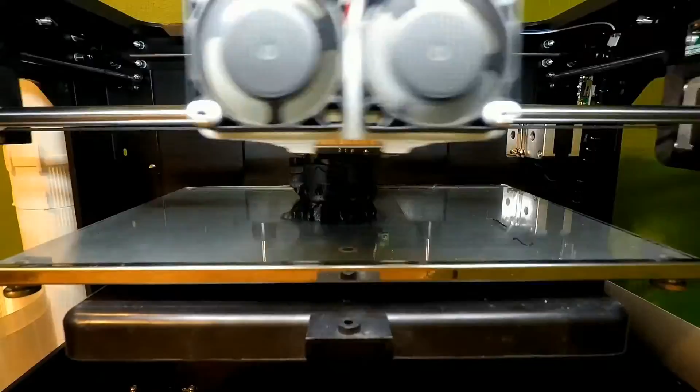All right, everybody, here's the tire. Let's go ahead and take it apart so we'll see what we have to make. We've got to make the actual tire itself, and then we also have to make the wheel hub with some clips put together. So we're going to go ahead and hit Fusion 360, model the tire up, and I'll also show you how to model the hub, print those out, and we'll install our new rim.

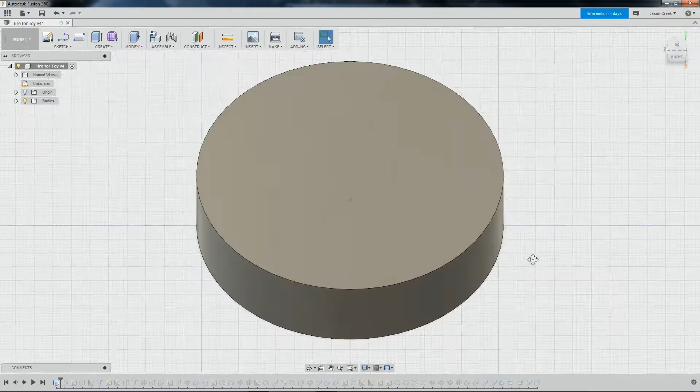All right, we're going to go ahead and make the tire. I've already done this, but I want to show you the steps I took to create it. First, you're going to need to make a cylinder the size of the tire itself. It's completely solid right now. Next, I did a fillet on the outside of the tire, as you see here.

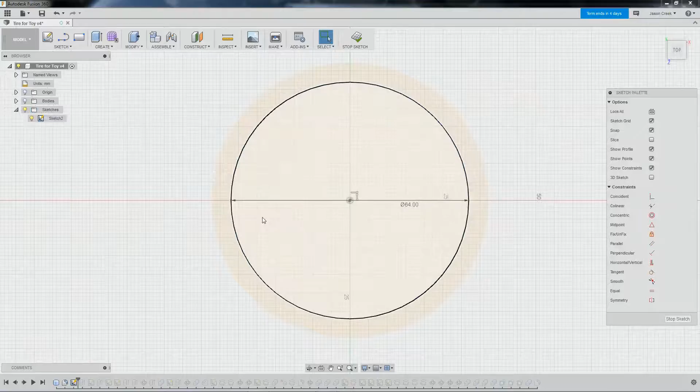We're going to do a sketch, and in this sketch, we've just created the inside of the tire. And we're going to extrude that new sketch to cut out the section for the hub. Another sketch is going to be created for the center, and that sketch is going to allow us to extrude the center section, which is actually going to fit onto the axle of the toy.

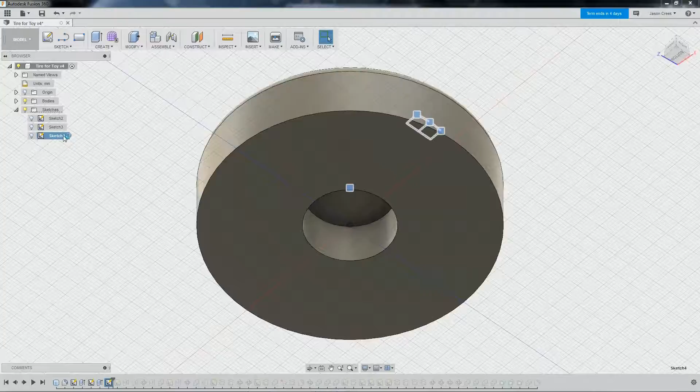Next, we're going to do another sketch, and this one, we're creating the holes that the hub will connect into. And we're also going to make a sketch to subtract material from the inside of the tire where it's not needed.

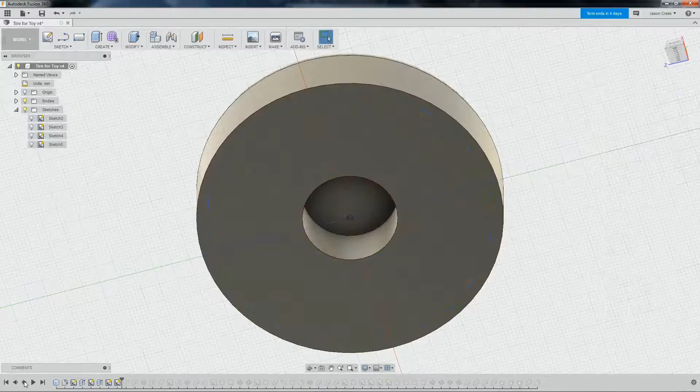And once that's done, we can then create our tool that we're going to use to cut the holes. I created a new body so that we can use the pattern tool and use 3 of them to cut our holes into the tire. I then extrude them so that they're below far enough and we can cut them out.

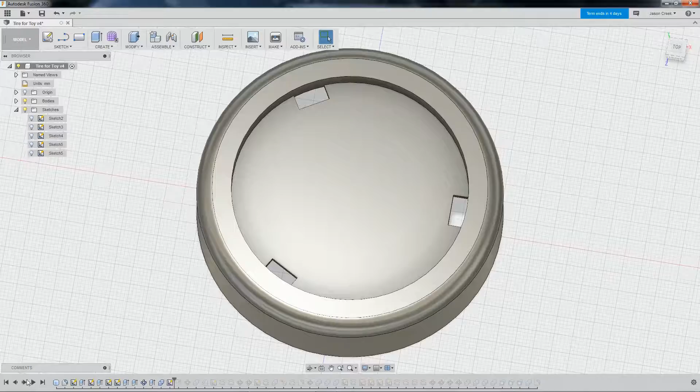Once that was done, I created another sketch and basically created a bar in between the outer wall of the tire and the inner wall for support. And then I extruded that as a new body. Used the pattern tool to create multiple, just like the original tire had from the toy.

Combined it all into one piece, and then I did a chamfer on the inside of the rim to match the original. So it's round on the outside like the tire and chamfered on the inside.

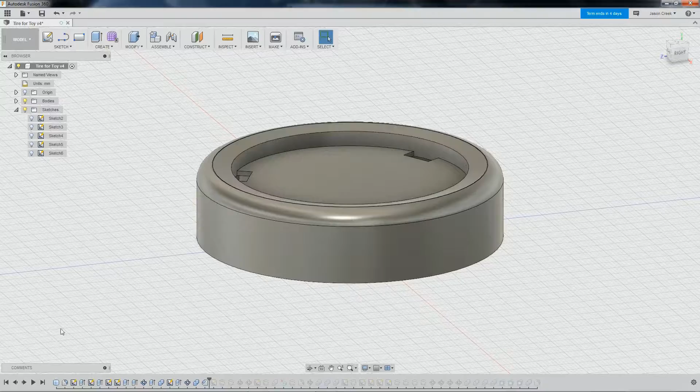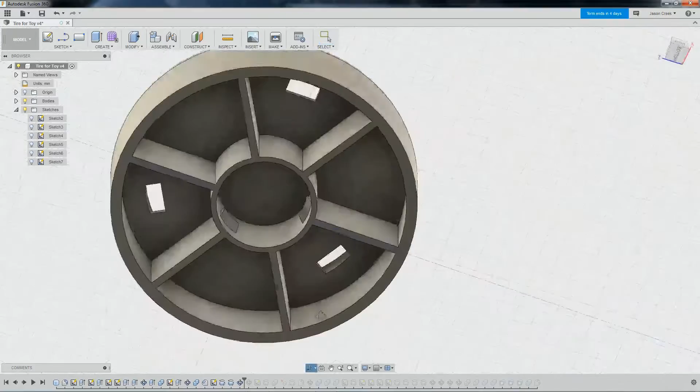Another sketch, this time to create the actual clips that will lock the tire onto the toy. I then rotated that out, creating one. Rotated that around, so I have all 3 that are needed. I should have left more room in this because after I put this test tire on, I was unable to take it off, and that's most likely because this clip comes out too far to release.

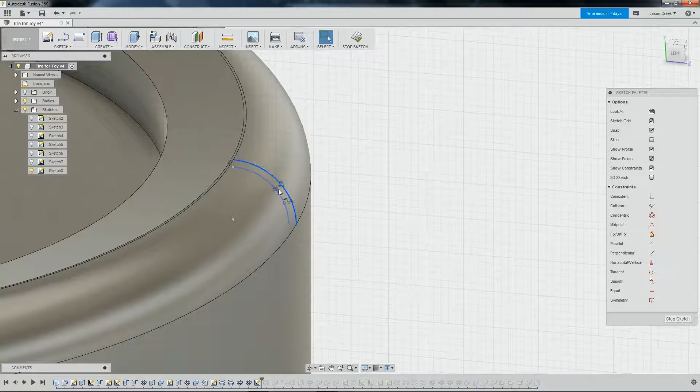Created a new sketch, which is on the side of the tire here. And this was so I could subtract the outside of the tire itself so I could start putting tread on. Although I ended up with this little thin layer here and I ended up deleting that. Then I rotated that sketch again to create one piece of tire tread.

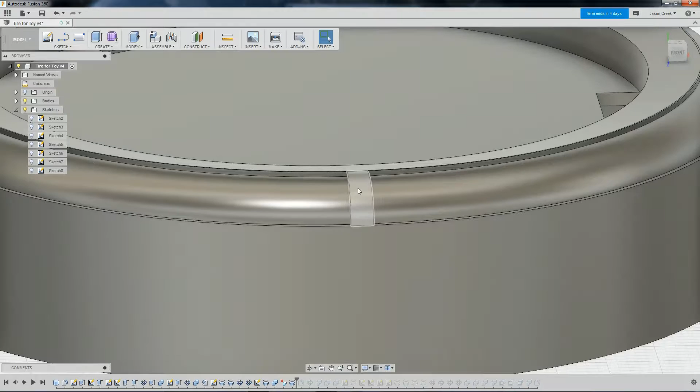I then used the fillet tool to round the edges, and then the pattern tool to create the tire tread all the way around. Next, combining took a little while. The key is getting it lined up so everything touches.

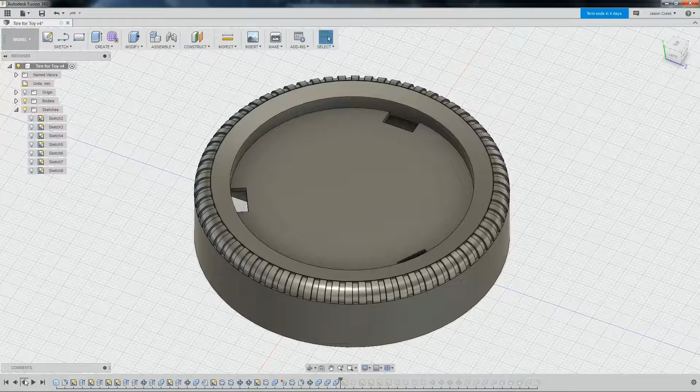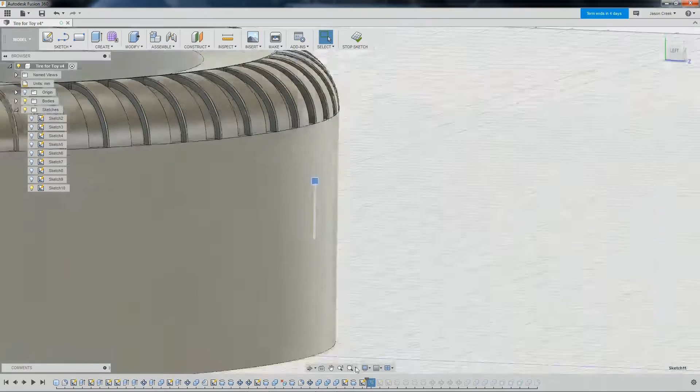Created another sketch, this time on the side of the tire, and I subtracted a very, very thin layer. And then I proceeded to make multiple sketches that allowed me the opportunity to make a thin effect on the outside of the tire in patches, as so. And then I rotated those to make the tire tread.

Now the test tire had this pattern on it. It wasn't deep enough for the printer to really get a good texture, just a ripple effect. So if I ever went and printed this tire again, I would change this and make the divots in between each piece of tread deeper.

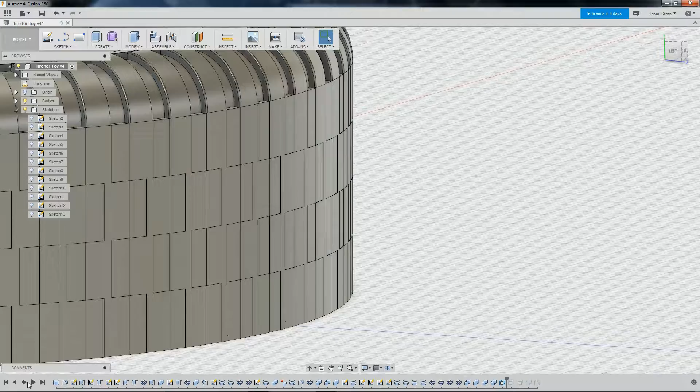Then I combined all the pieces together into one piece and corrected a mistake underneath where I needed to connect these clips to the actual tire itself. Small issue, but fixed nonetheless. Then I was able to combine them properly, and I was done with the tire itself, and it went to the printer.

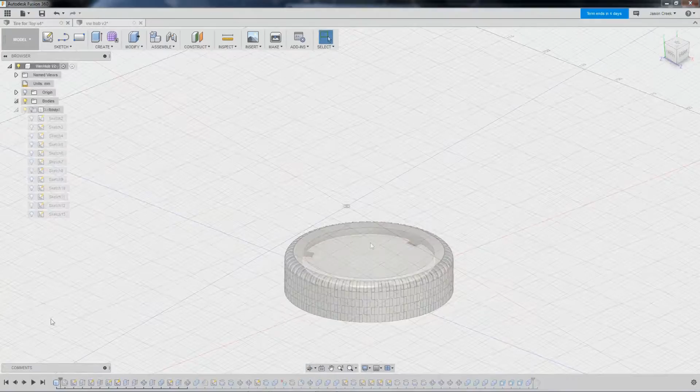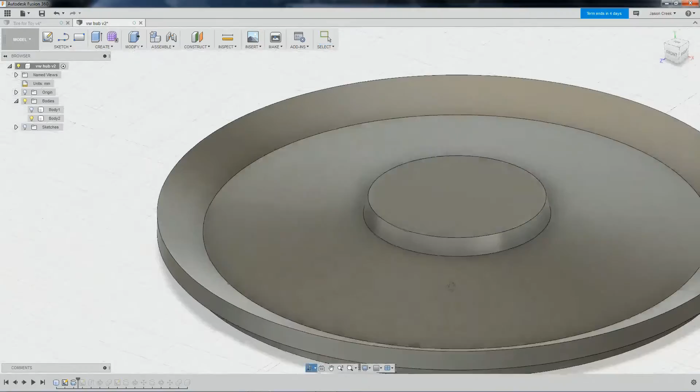Okay, let's take a look at the hub. I started out by making a sketch, and this is the sketch I created for the main hub. It's just an outline of what the hub should look like from the side if you were able to cut it open. I then rotated that around the center to get this, almost like a dish or a coin.

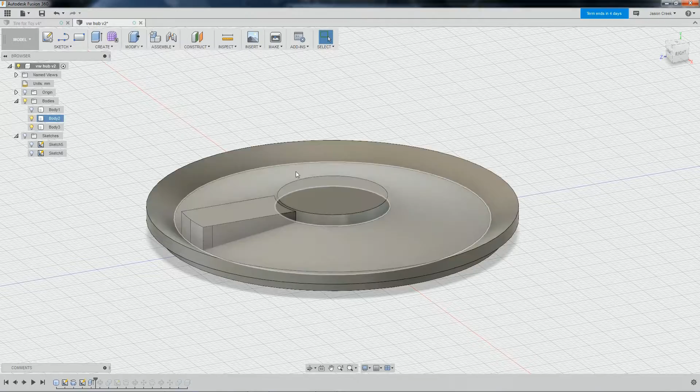I then created another sketch, this time it was for the cutouts. Extruded that to allow me to use it as a tool. Created a pattern to match the tire's hub. Subtracted it.

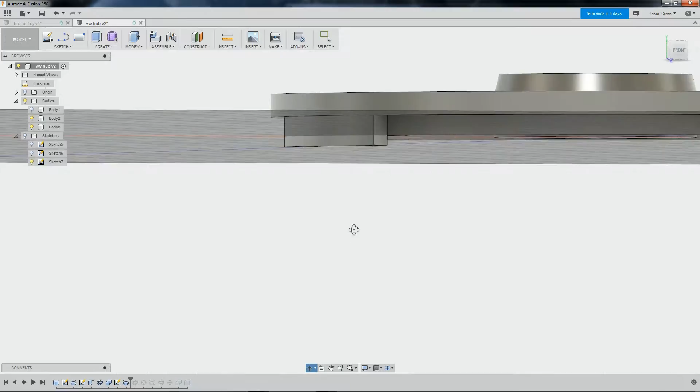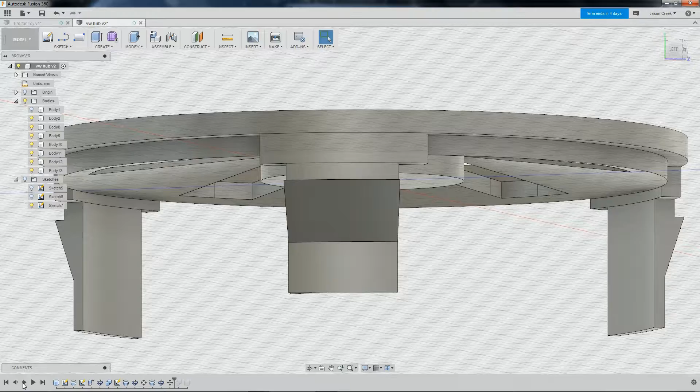And then created the sketch for the actual clips that lock it into place. Rotated just the one piece that is needed first that's wider than the actual clip that sits on the tire. Rotated that around the whole platform. Moved it to match up to where it needed to be. Created the clip itself. Used the pattern and then rotated it with the movement tool around the center to get it lined up.

After that, combined it into one piece and then trimmed the clips to save material on the printer. That's it. Send that to the printer and then we'll combine them together.

All right, now that we've made the models in Fusion 360 and I've printed them out, I went ahead and tested the tire before I made the hub. The tolerances that I made for the center where it actually clips onto the axle section of this toy were too tight to allow me to take it back off. So it's on here, it's stuck. Let me show you that real quick.

So we've got our tire with our 3 holes for our hub, and it's got tread on it. So it looks pretty nice. And then we have the hub printed out in white, and then I used an airbrush with a pearlescent silver.

And let's go ahead and try and put that on and see what we've got. See if it fits. And it's going in there. And it looks to be in.

Yeah, there we go. So now we've got our original wheels and our replacement. Now I know it doesn't have the logo in the center there, but it is just a toy. And I was able to replace the wheel that you can't get anymore, so I'm pretty satisfied with that.